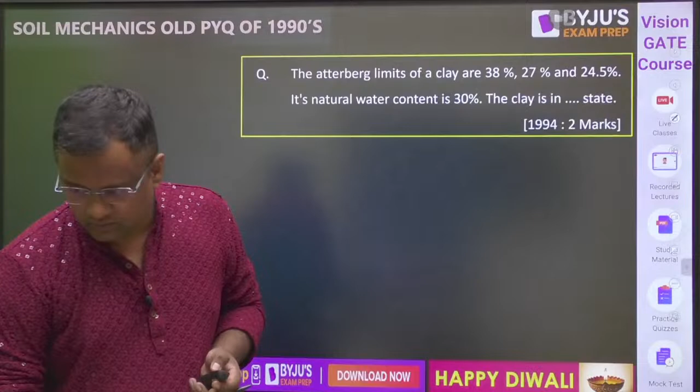Audio video fine, I am again asking. So the Atterberg limits of clay are 38%, 27% and 24.5%. Its natural water content is 30%. The clay is in which state?

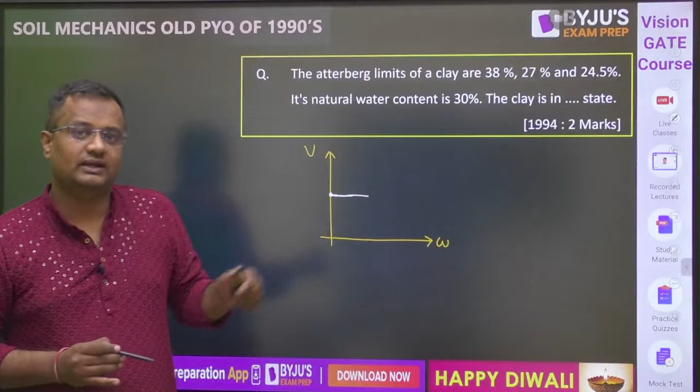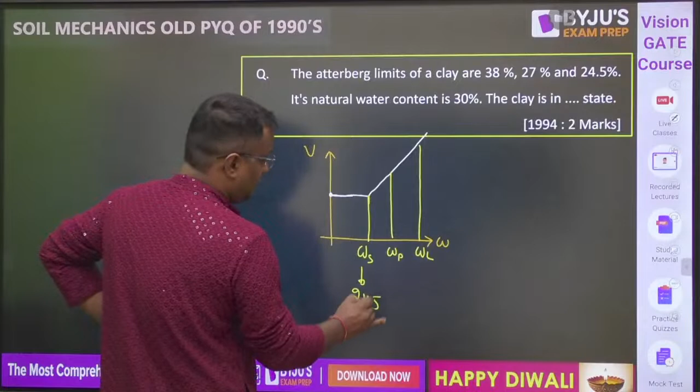If I draw the graph of water content versus volume, when the soil is dry, let the volume be somewhere here. Fill in the water, so air will be occupied by water. When all voids are occupied, there is no other air void where water can accommodate, so after that volume starts increasing. This is shrinkage limit, after which the soil starts increasing in volume. This is plastic limit, this is liquid limit. So shrinkage limit value is 24.5, plastic limit value is 27, liquid limit value is 38.

And our existing soil, the water content is how much? 30%. So it's somewhere here. Okay, so answer will be which state? Tell me in the comment box, answer will be which state guys? Come on.

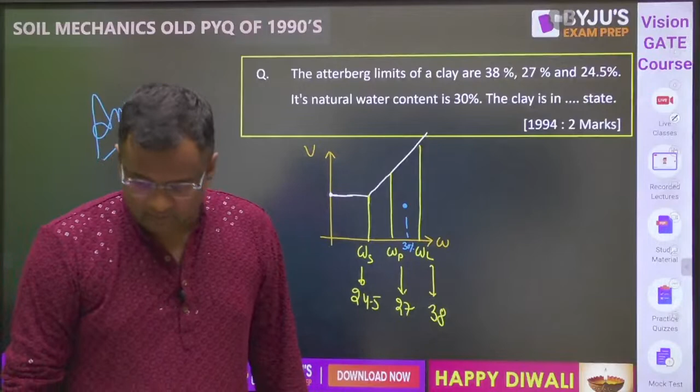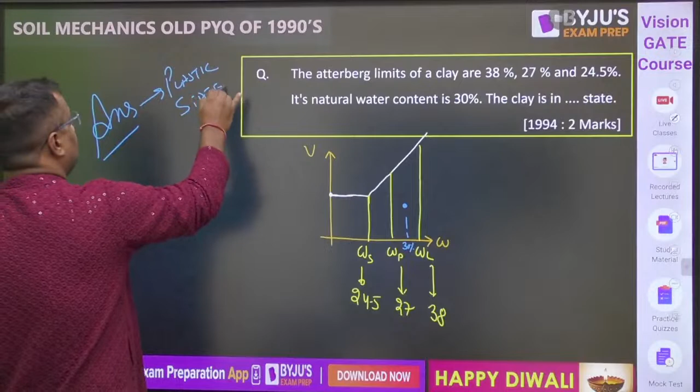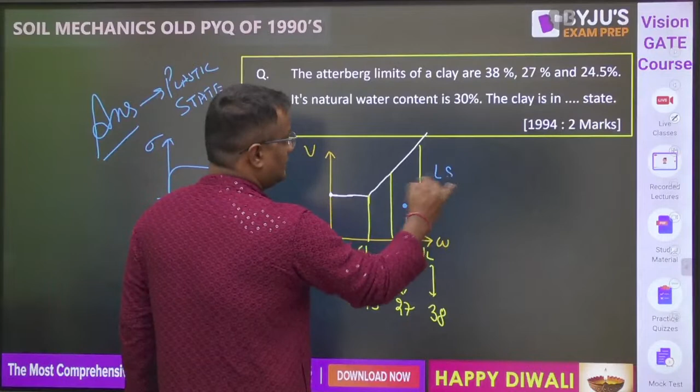Okay, so this is in plastic state. Plastic state means, if we apply the stress strain diagram in the plastic state of soil, it will be like this. So this is liquid state, this is plastic state, this is solid state, and this is semi-solid state. As we increase the water content, the liquidity goes on increasing.

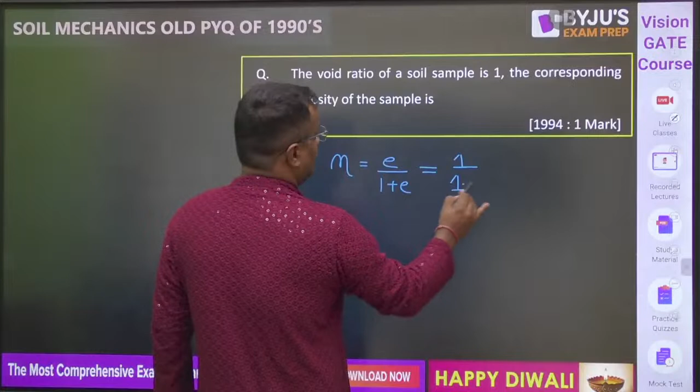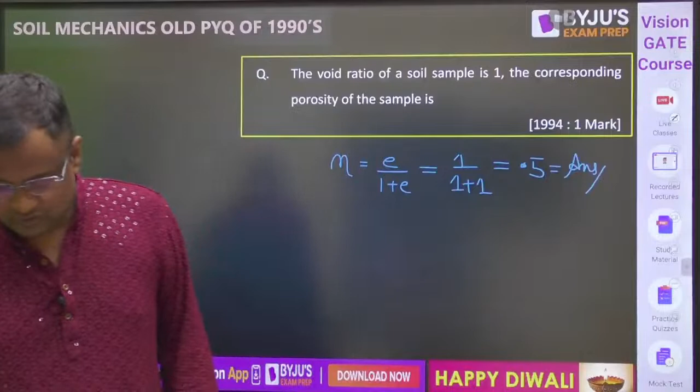Okay, the void ratio question was from 1994, 1 mark. The corresponding porosity. So porosity n is equal to e upon 1 plus e. Void ratio is 1, so 1 upon 1 plus 1, that is 0.5. Got it? Great, let us move further.

Consistency is the relative ease with which soil can be deformed. Okay, and as water content starts increasing, the soil goes on to the liquid state: from hard to semi-solid, semi-solid to plastic, plastic to liquid. Okay.

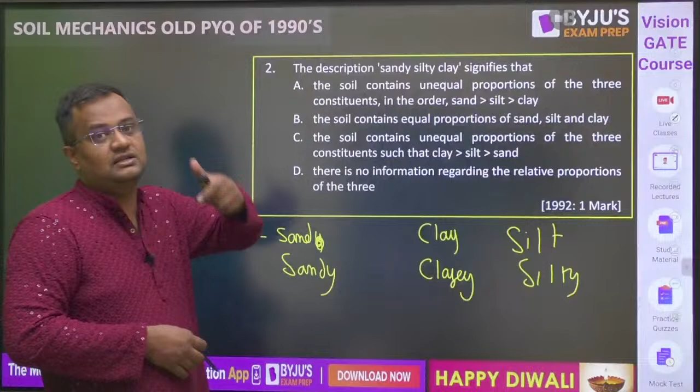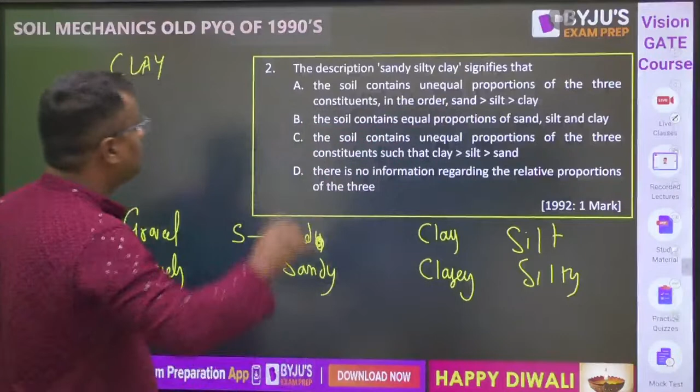If sand is used, sand is the larger fraction. If clay is used, clay in that soil is the larger fraction. If clayey is used, clay in that soil is the smaller fraction. Similarly, if silt is used, silt is large; if silty, it is minor, it is less. So the words here are sandy, silty, clay. So the greatest will be clay, because it is not clayey, it is clay.

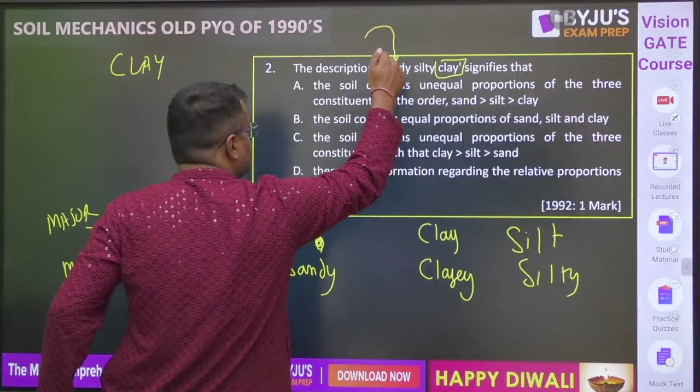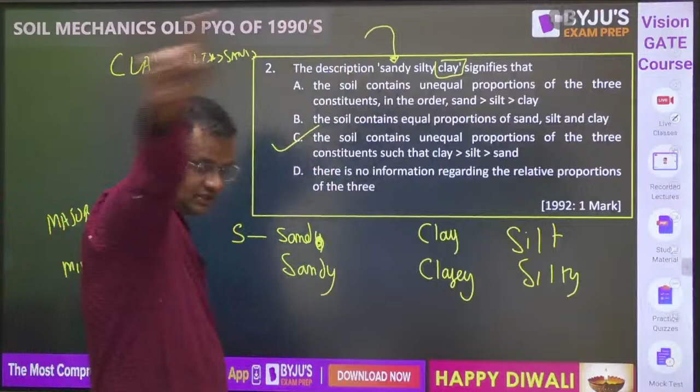Then, if two words are written and both are minor, the first word is the least. If sandy and silty are both written, then the first word, sandy, is the least. So clay, then silt, then sand. Okay, that is the option. Have you understood the concept, guys? Have you understood the concept, everyone?

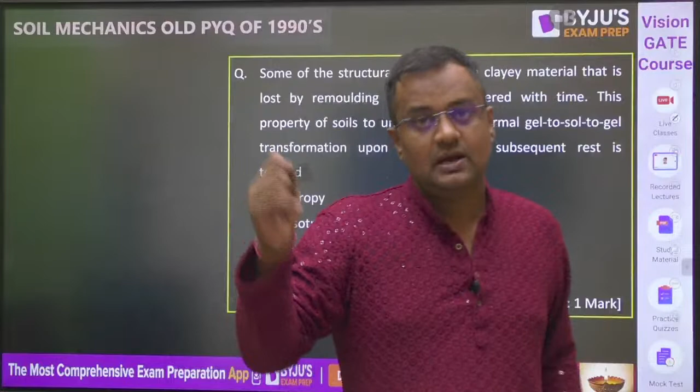Next. Some of the structural strength of clayey material is lost by remolding. Okay, then it is recovered with time. This is which property? This is thixotropy. Thixotropy is the property in soil mechanics by which soil regains its strength with time. Okay, got it?

Everyone, every commando, understood?

Okay. Effective stress in a sand layer below a lake does not alter as its level fluctuates. See, guys, if there is the lake, and below the lake it is a sand bed, this is P. So even if the water is fluctuating here, the effective stress will not be changing here. Sigma bar P is equal to sigma minus U.

Now suppose a lot of rain comes in the monsoon season. The water level increases. So the increase in total stress sigma is due to the weight of water, and pore water pressure is also increased by this weight of water. So both are increased by the same amount, because only the water is affecting that. So it will not be changing; 'does not alter' means true. Earlier true/false also comes.

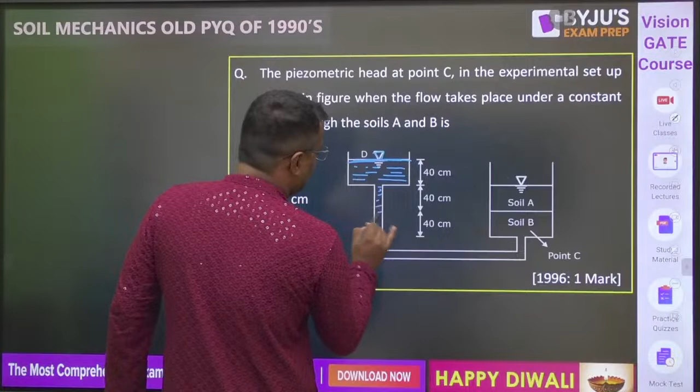Now this is a nice question. I want to check who can do this. This is water, and here it is saturated soil. Here is soil A, which is saturated. Here is soil B, which is saturated. And here is point C. This is point C. Now what do you have to write?

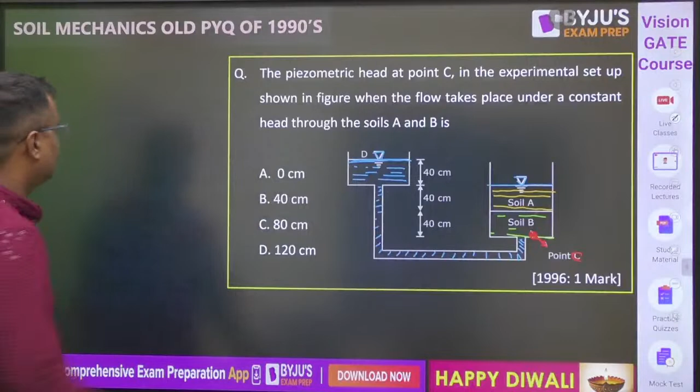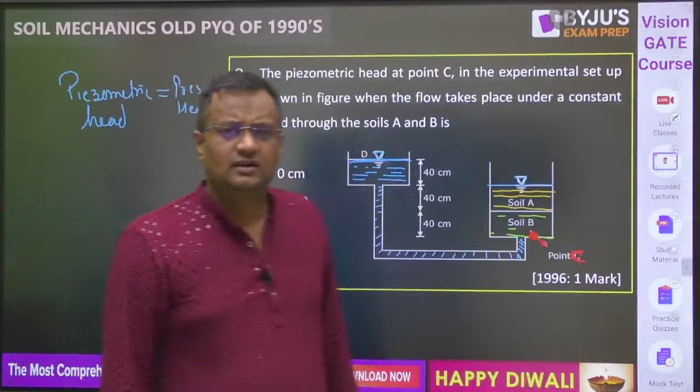You have to write the piezometric head. What is the piezometric head at this point C? This one is point C. What is piezometric head? It is pressure head plus datum head, and in soil mechanics this is also total head, because in soil mechanics velocity head is equal to 0, and therefore piezometric head is equal to total head.

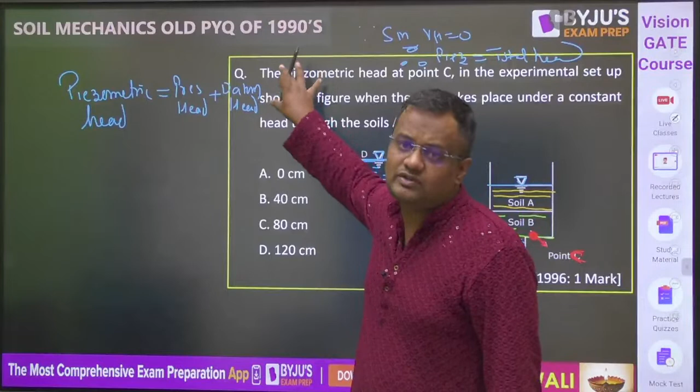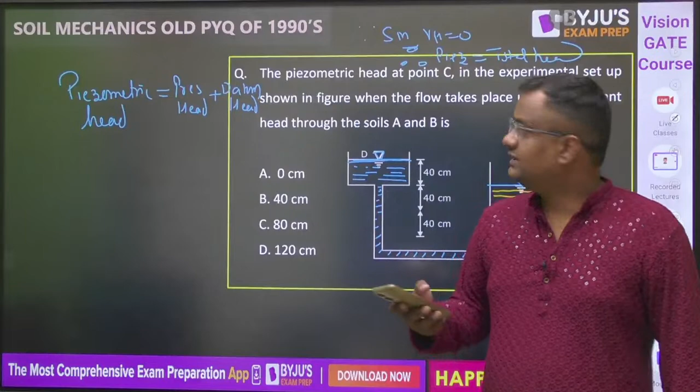Piezometric head is equal to total head, because total head is pressure plus datum plus velocity, and that velocity term will always be 0 in soil mechanics. Why? If it is a rest condition it is 0, and if it is a moving condition then also it is 0, because the movement of soil is very less. In seepage condition also we take it 0. So piezometric head and total head are the same.

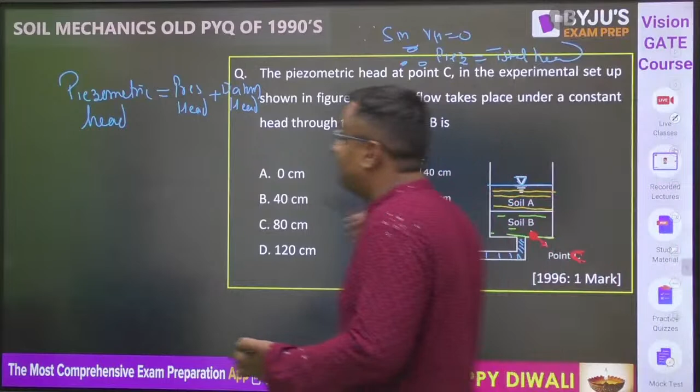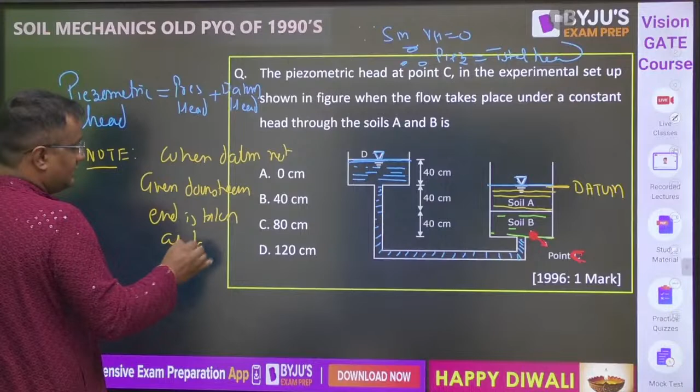Now one more question in your mind: sir, what when datum is not given? This has happened 2-3 times in GATE PYQs. So whenever datum is not given, you have to take the downstream end as datum. Please note this in your rough copy. When datum is not given, the downstream end is taken as datum. Okay, now do the question.

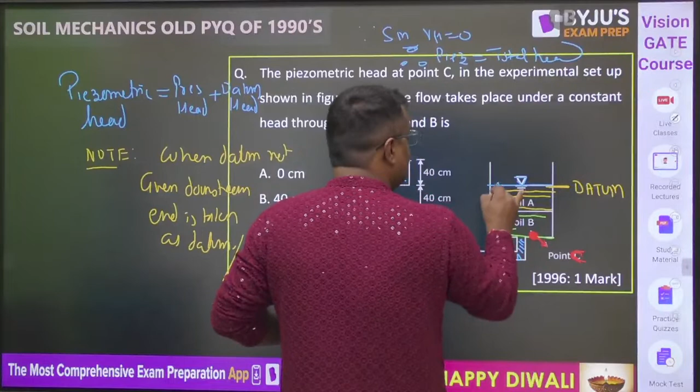It is not hydrostatic, water is moving. Here it is high head, here it is low head. Head difference is 40. So actually it is seepage condition. So here in seepage condition, at H height you cannot write pressure gamma W H. Okay, so that is why it is wrong.

Now, guys, that C point here and this point C dash, both will be having same pressure. At same level, pressure is same. This is an incomplete statement. The complete statement is: at same level, pressure is same only if we can go between those 2 points through the same medium, same liquid. And from C to C dash, we can go water to water.

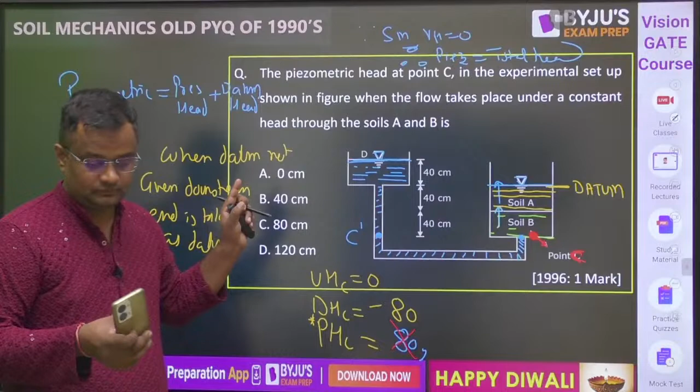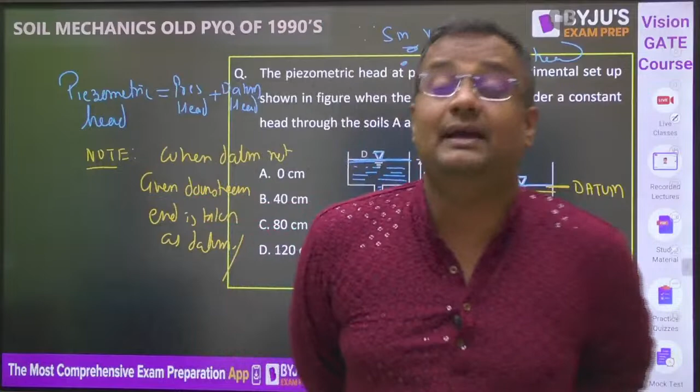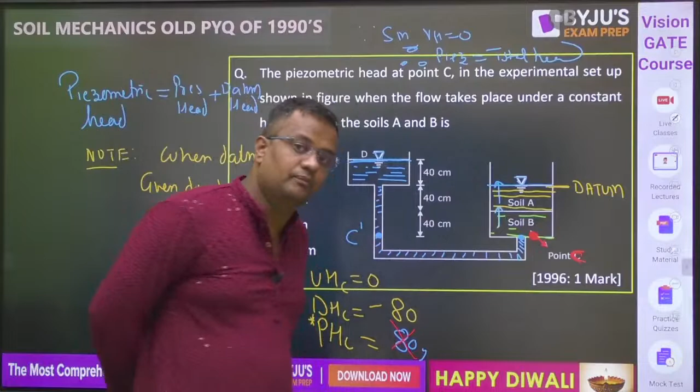Okay. So pressure will be same, because we can go between these 2 points water to water, C to C dash. We generally say the pressure is same at the same level. No, that is an incomplete statement. Pressure is same at same levels when between those 2 points we can go from water to water. So from here to here we can go water to water. So pressure is same.

Now at C dash, what is pressure? Here in water there is no loss, because as we go downward, the pressure head is increasing and by the same amount datum head is decreasing. All loss, seepage, everything is here. So here I can write pressure is 120. So 120 is correct.

Excellent question, guys. Piezometric head is pressure head plus datum head. So pressure head is 120, and datum head is minus 80. So it is net 40.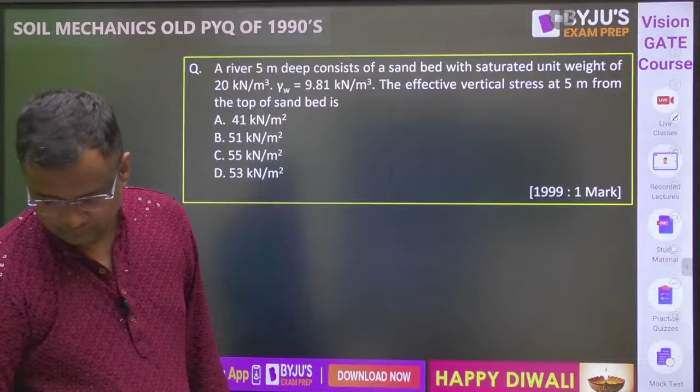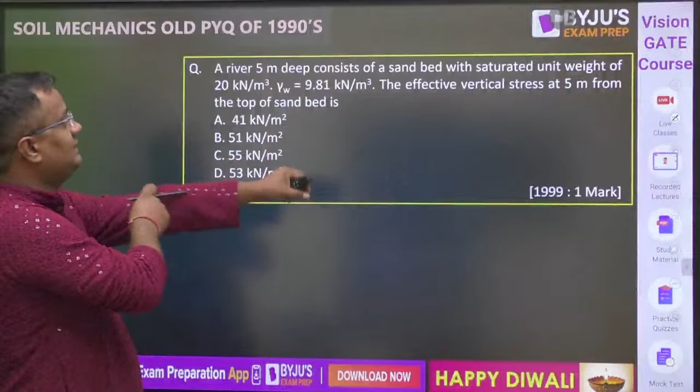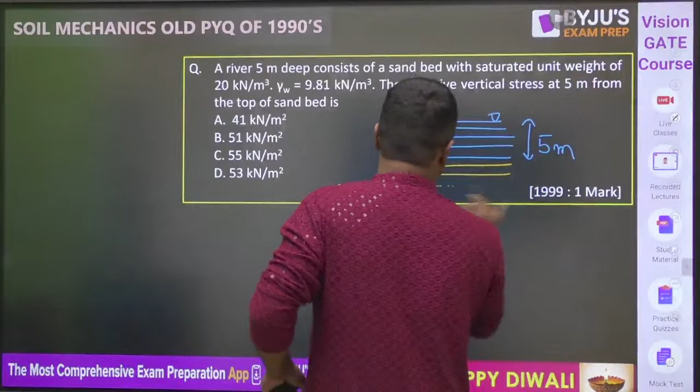Okay. A river 5 meter deep consists of a sand bed with saturated unit weight of 20 kilonewton per meter cube. Gamma W is equal to 9.81. The effective vertical stress at 5 meter from the top of sand bed is? Guys, there is a river, 5 meter deep. Below is the sand bed. From top of the sand bed, 5 meter below, at this point I have to write the effective stress.

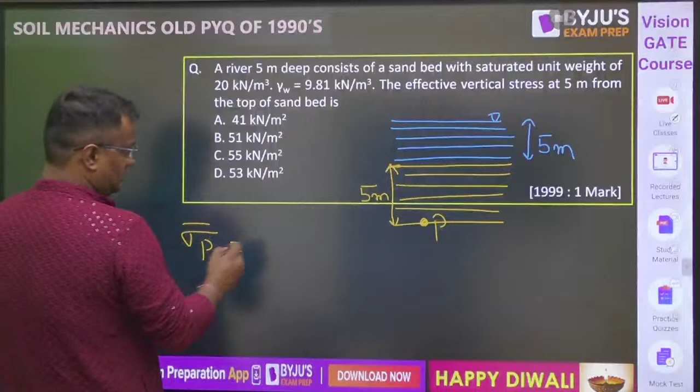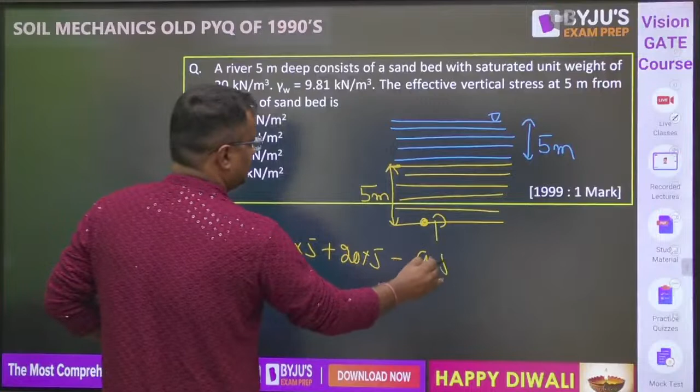So sigma bar P. Also guys, we can neglect this here, because with fluctuation of water above ground level there is no change, or we can take it also. So total stress is 9.81 into 5, the stress due to water, plus 20 into 5, the stress due to soil, minus pore water pressure, 9.81 into 10. So the answer will be around 50 or something. 51, I guess, from rough calculations.

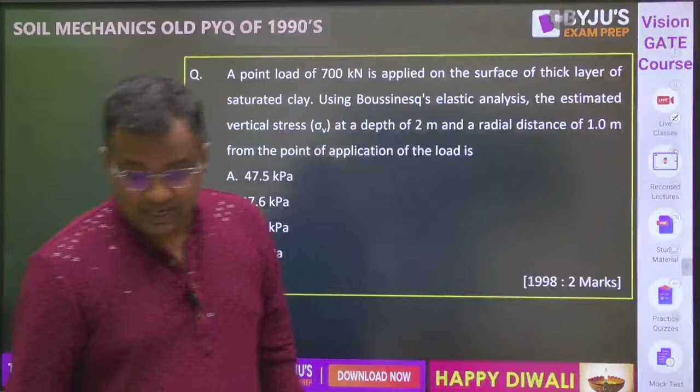The vertical stress directly below is sigma vertical is K into Q by Z square. So it is K into P by Z square. Now do this. Westergaard is not in the syllabus right now. Okay, but Boussinesq is in the syllabus. Do this and let me know the answer. Everyone, come on.

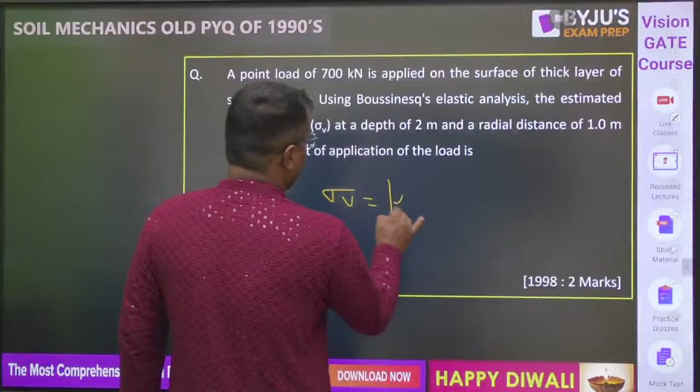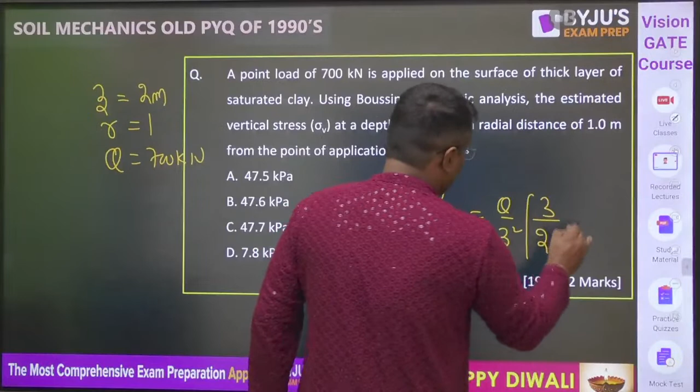And K_B into Q by Z square. So Z is 2 meter, radial distance is 1 meter, Q is 700 kilonewton. What is the answer coming? K formula I am writing, please check I am correct or not, because I am not remembering the formula.

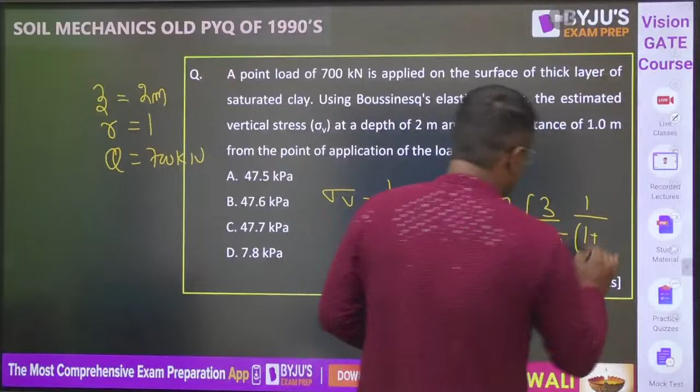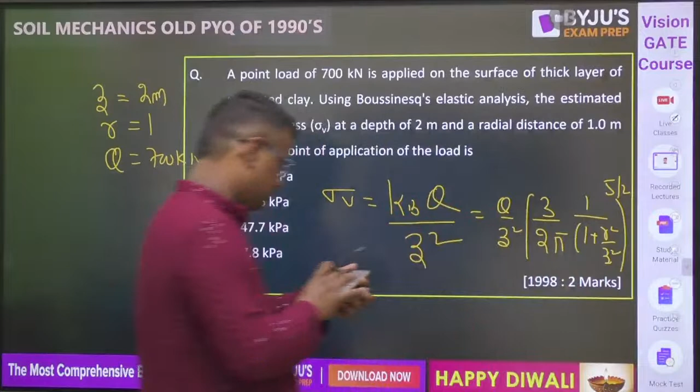Okay. Everyone, 3 by 2 pi, into 1 over 1 plus r square by z square, to the power 5 by 2. Please check. Formula is correct.

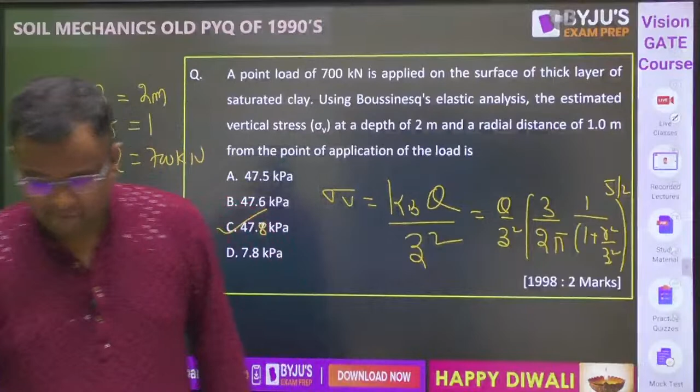Now this question: the time for a clay layer to achieve 90% consolidation is 15 years. The time required to achieve 90% consolidation if the layer were twice as thick, 3 times more permeable and 4 times more compressible? Nice question. Let me check who can do this. Everyone.

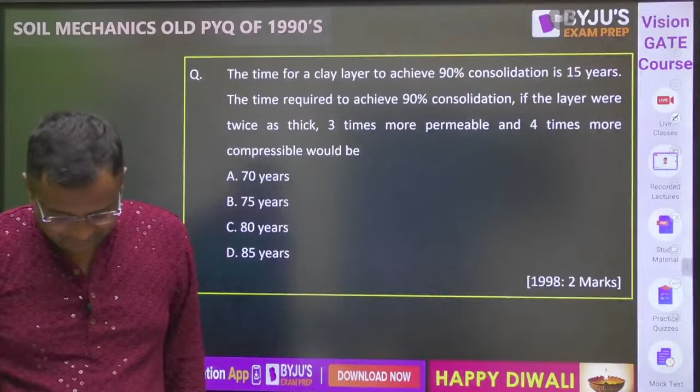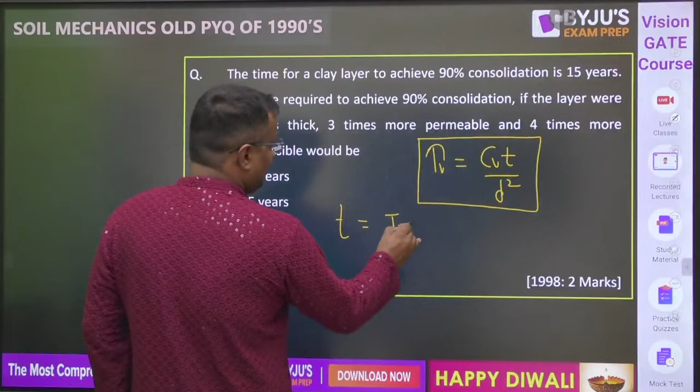Now guys, TV is equal to CV into T by D square. Correct? The time for a clay layer to achieve 90% consolidation is 15 years. The time required to achieve 90% consolidation again if the layer is twice as thick. So time is equal to, from here, TV into D square by CV. And now we have to find out the ratio of the 2 times. Earlier the time is 15 years.

TV, let me remove TV from the picture, because both times they are comparing 90% consolidation. So TV is not in the picture, so it is proportional: T is proportional to D square by CV, because TV is same. Now the depth, if the layer is twice as thick, depth double हो गया है.

So वो 4 times आ जाएगा. D is changing to 2D, so 2D square will be 4D square. So time में एक तो 4 गुना फर्क पड़ जाएगा. 4 times there will be difference because the depth is changed to 2 times. Now, twice as thick, 3 times more permeable and 4 times more compressible.

So now CV. Guys, CV is equal to K upon gamma W into MV. Now it is 3 times more permeable. So new CV dash: 3 times more permeable, gamma W is same, and 4 times more compressible. So new CV dash is 3 by 4 times of earlier, because this is changed by 3 times, this is changed by 4 times.

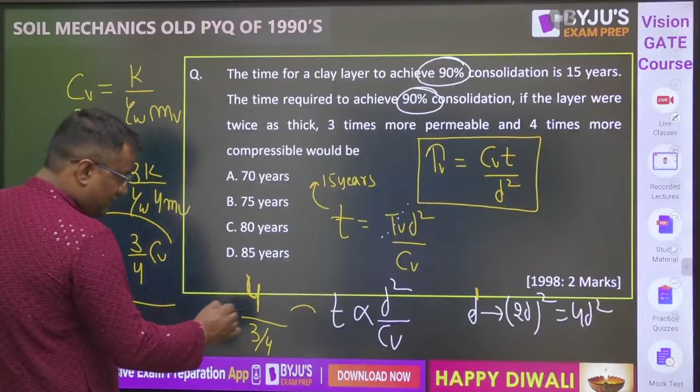So the numerator is changing by 4 times, so time will increase by 4. And denominator is changing by 3 by 4. So 4 divided by 3 by 4 is 16 by 3. So time is changed by 16 by 3. Earlier the time is 15, now it is 16 by 3 times. So 3 fives is 15 and 16 fives is 80.

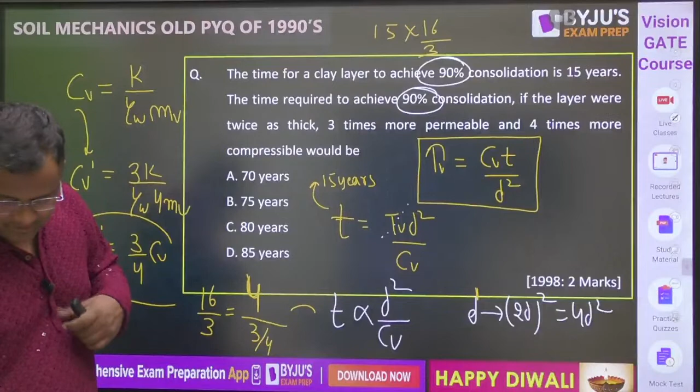Guys, are you getting the same answer? 80 years? Have you understood? Excellent question, guys. Excellent question.

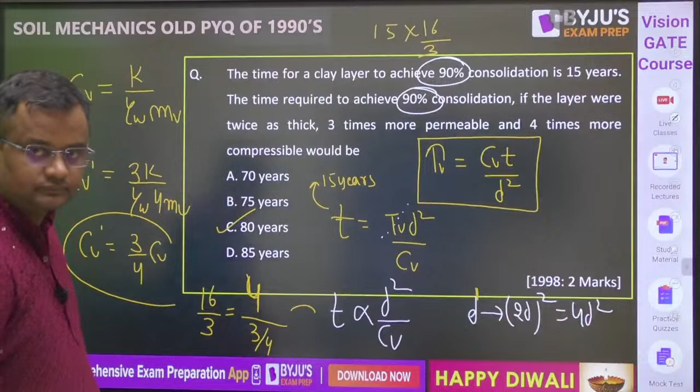Okay, match the following. Guys, always remember one thing: flexible footing, pressure same, delta different. And rigid footing, delta has to be same, it is rigid, and pressure different. Now the correct answer is A. See here.

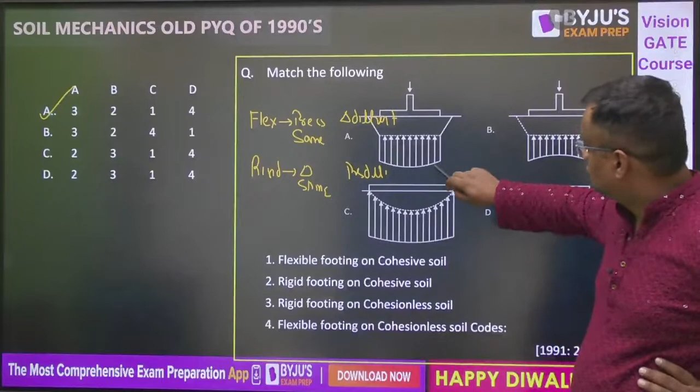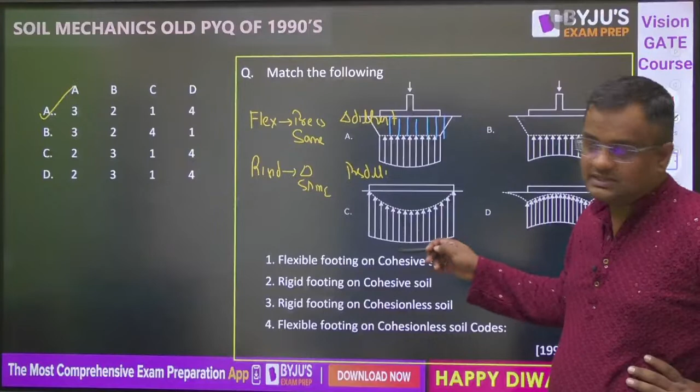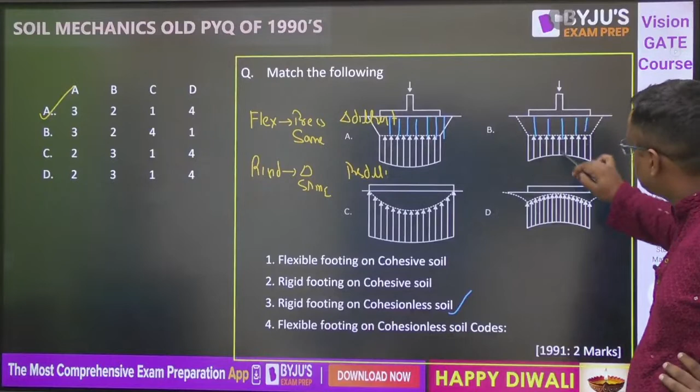First is this. So here guys, the settlement is same. It settles this much here, this much here, everywhere the same. Settlement is same and pressure is different. Settlement same, it will be rigid, and this kind of pressure is for cohesionless soil. Now here settlement same, again rigid. Settlement same and pressure is decreasing at the center, that is for cohesive soil.

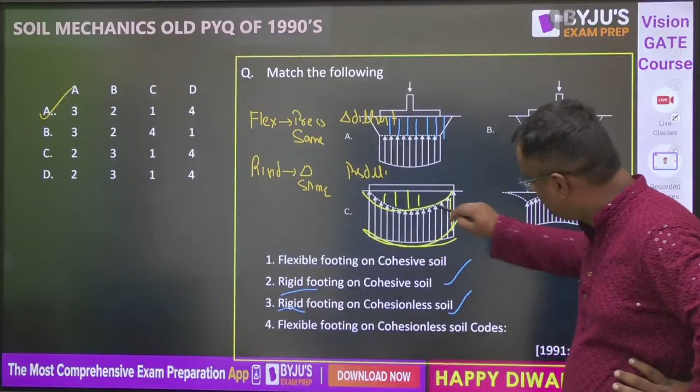It is rigid. Why rigid? Because settlement same. Now here settlement is different, flexible, but contact pressure is same. Guys, here contact pressure is same. These two are parallel, so distance between them is same. So it is flexible, and this kind of footing is flexible for cohesive soil. And that is flexible for cohesionless soil. The contact pressure is same.

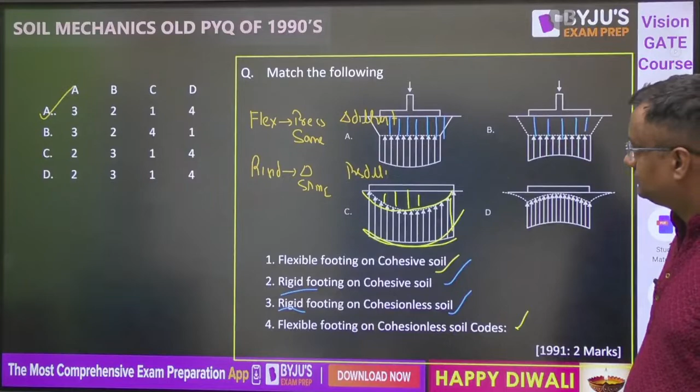Give me yes or no. Jaldi se everybody. Yes. Come on.

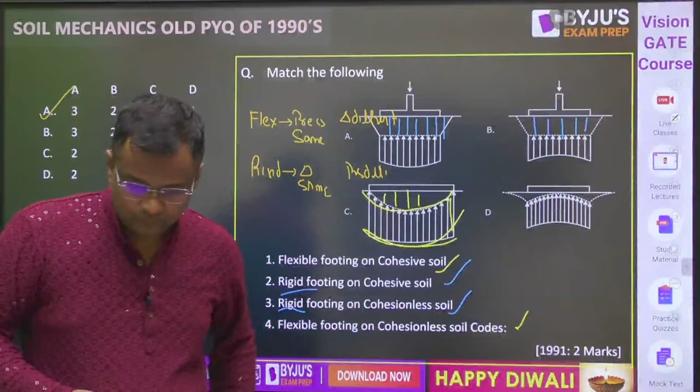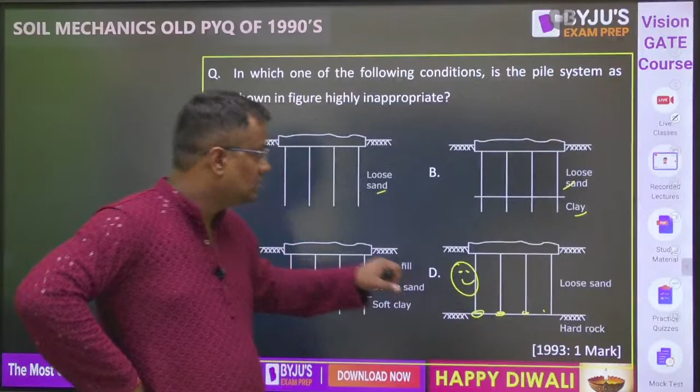Because here the piles are at the firm stratum, hard rock. The others are okay, not as good, but at least they are providing some frictional load, frictional capacity QF, and bearing is also providing, but not that much because it is not hard. But this is the worst because the end is also on the soft, very low,

almost zero, on the soft clay, cannot provide much strength, and even worse, it is making negative friction due to loose fill. It is acting like Vibhishan: instead of helping Ravan, Vibhishan helped Ram. Actually the friction should act opposite to the load, but here it acts towards the load, so it is increasing the load, guys.

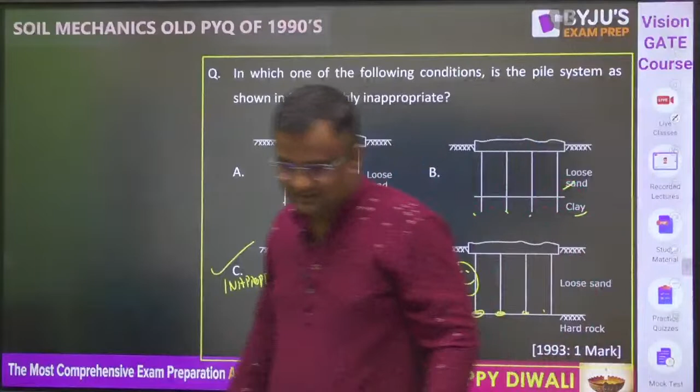Now, frictional piles are also called floating piles. Absolutely true, guys. Negative skin friction occurs when the surrounding soil settles more, so it is providing the negative drag, the downward drag.